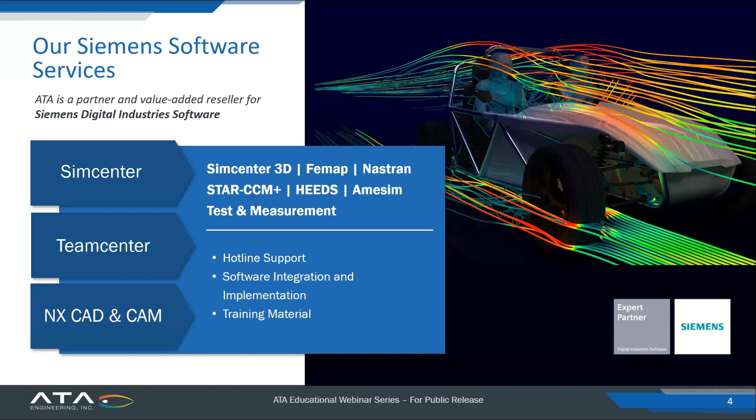I think it'll be interesting to talk about ATA Engineering and Siemens history. It all goes back to a company called SDRC. In the years of 2000, ATA Engineering spun off from SDRC, and we formed our own company called Advanced Test and Analysis Division. At the time, SDRC developed a tool called I-DEAS and later got acquired by Unigraphics and later got integrated into a well-known product called NX, which kind of started out the whole journey of ATA Engineering and Siemens.

Before I go on, I think it's important to thank my colleagues and appreciate their dedication to this project. It's been a project we've worked on to showcase how we can use our tool for this. One good thing about Simcenter 3D is it allows you to leverage your global expertise wherever they are. Because it's CAD-based, you can access the same CAD irrespective of the location you're based in. It can be the same country or a different country, and that's one of the benefits of having a CAD-based system.

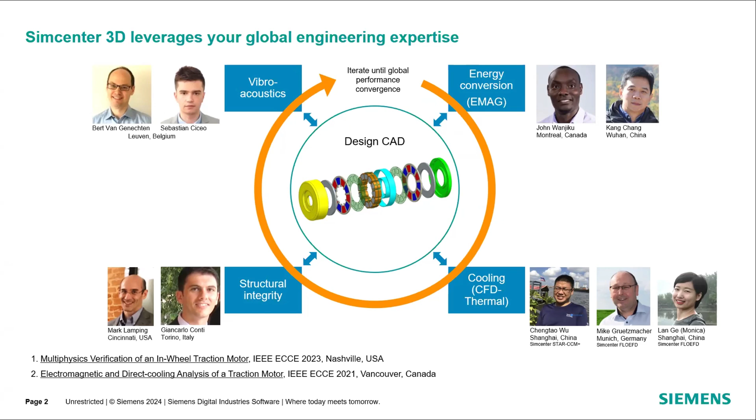We can start off with the trends. I think it's very clear now that we are racing towards EV affordability. All the OEMs, especially in the Western world, are trying to find out how to have a competitive vehicle they can sell to the mass market. Not only that, there's also competition for market share.

We can see that late last September, in China, Volkswagen actually dropped the price for the ID4. It was going from a 26,000 introductory price, now it's about 20,000. If you're in North America, that would be a very good deal if you could access an ID4 at 20,000 US. So that is in China.

Then we know Tesla has been shaving off prices all the way from last October, shaving off 1,000 here, 1,000 there. And this has not yet stopped - they're still doing it even up to today.

Then in February this year, we see BYD actually sent about 3,000 vehicles to Germany. They have gotten into a deal with a ship they call the Explorer, Explorer number 1, which has a capacity for about 7,000 vehicles. So the first shipment was this February, the 27th.

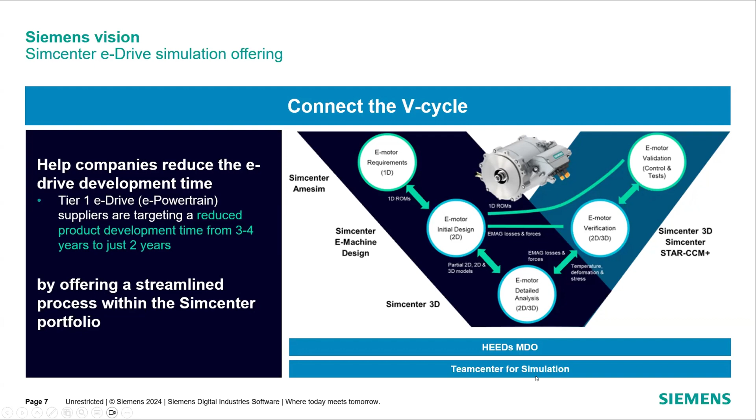This is what Siemens' vision for Simcenter e-drive actually looks like. We are going to concentrate today basically on the detailed analysis in terms of EMAG, and also the verification in terms of the other domains. This V-cycle can be wrapped up with HEEDS for design or managing the process, or you can wrap it up with Teamcenter to be able to track that process.

At the verification stage, what you're trying to do is balance out all this interaction of the multi-attribute performance. We know this is an iterative process. Imagine, and this is something we know is going to happen, we don't know when, but I think it must happen: with this pressure that tier ones are facing, they must be told we need to reduce the cost of the drive by this amount of money.

So the highest priority you'll see is how can I reduce the cost of materials? Can I make a smaller device? Can I swap materials for cheaper ones? Or in terms of magnets, can I actually have a topology that doesn't use magnets completely?

That's a vertical requirement where management says you have to reduce this by a certain factor. Then, if you are the EMAG structure, that's a small portion, but it sets up the rest of the process.

If I switch my machine from one using magnets to one that doesn't, basically an induction machine or a switched reluctance machine, that has other implications in terms of noise and cooling. With an induction machine, I need to cool the rotor. With a switched reluctance machine, I need to deal with vibrations and integrity issues.

So you see this is an iterative process where the decision of one physics might affect the rest. That's why you see the higher level vertical requirement—cost, material, weight reduction—and then the horizontal, how the physics interact with each other.

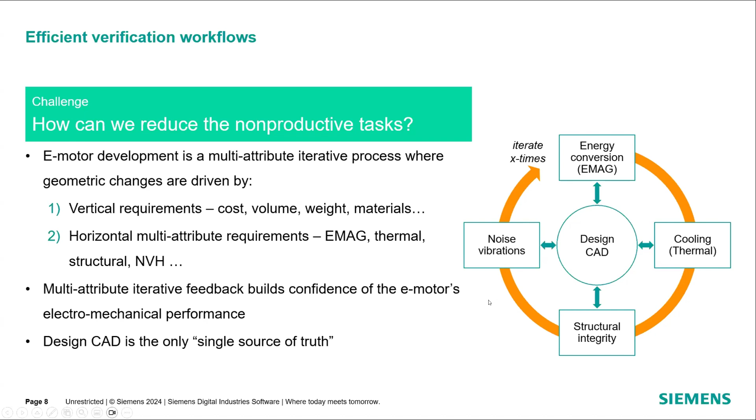You have different mesh models, simulation models, and the only source of truth for all these workflows is the design CAD. The question is, how can we use that design CAD? That's where Simcenter 3D becomes very important.

In a normal conventional single physics workflow, where I as an EMAG person sit on my own streamlined process, or an acoustic person or a thermal person, this is basically what you get—you get the CAD.

The CAD design team comes up with a CAD. I import it, or I talk to them nicely, and they clean it for me. If it's dirty, I have to return it. If it was produced for CAD design, it's not the same as for CAE analysis.

Then I do the pre-post—this is the setup, solve, and do the analysis. That's the normal process.

Now if I adopt Simcenter 3D, which is CAD-based and built on NX, I just consume that CAD as is because it's NX based. Because I'm cleaning it in NX, or Simcenter 3D, keeps the history, it won't forget what I'm doing. The import step is already gone.

Then I do my pre-post, solve, and analysis—I've already gained a step by reducing the import step, because Simcenter 3D allows me to grab what I need for my analysis. For EMAG, I just grab the EMAG bodies.

For CFD, I add my CFD cooling on top of that. If I'm doing acoustics, I add my acoustic pieces, or other things as needed. That's what it allows you to do.

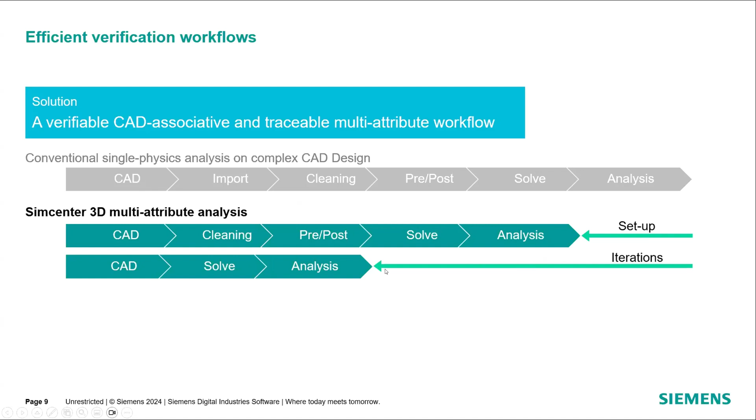Because it's an iterative process, if I change things, I don't have to redo this step, because it remembers what I did—that's why we're saving time. Simcenter really gives you an efficient verification workflow by eliminating some non-productive tasks.

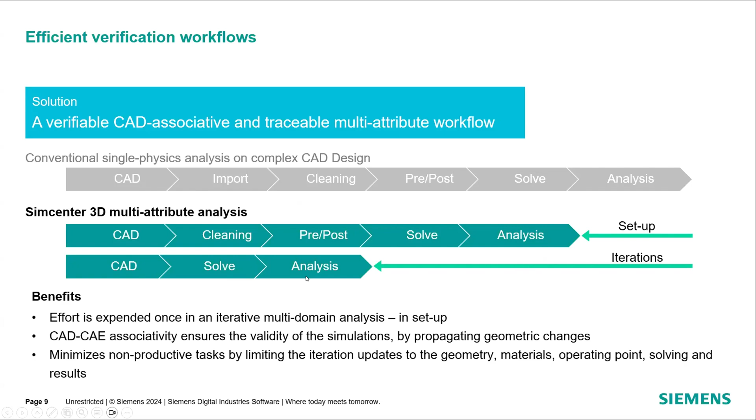The benefit is you only spend the effort once setting up the process. If that process is associative, anything you do on the CAD propagates immediately, rather than spending effort and time recreating the CAD, updating, solving, and doing the analysis. We believe this is what Simcenter 3D adds to the verification process. This is the process we'll use to showcase using an in-wheel motor.

And then we ask ourselves, why an in-wheel motor? So we need to make a case for that.

This is the simplest case you can ever have. If you look at this skateboard, basically an all-wheel drive skateboard, you have the front part of the drive and the back part of the drive. If you propagate them to the wheels, this is what you end up with, and you can see you have more room for cargo and passengers.

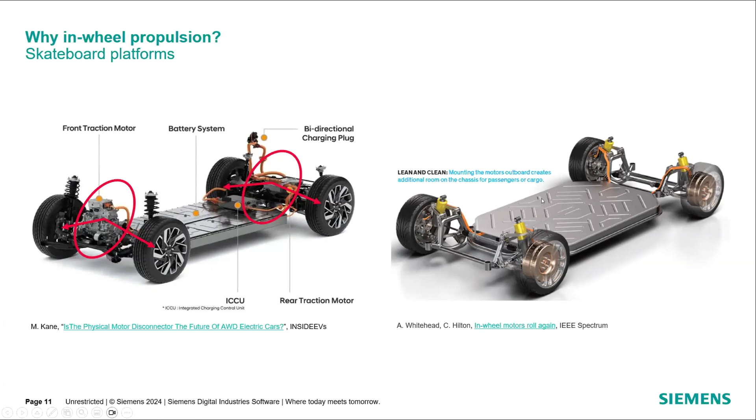The problem with this is you shift all that complexity to the wheel well. So you get more volume, but there's a price to pay, and the price is basically the handling and suspension system because of the unsprung mass.

Protecting these basically from the environment - water, dust, sand, ice. Then complexity, bringing all the power, the coolant, the controls into the wheel, and it's each wheel. And because you're stuck with this small space, that's all where your torque has to come from. There's no other place to produce that torque.

And if it's a two-wheel drive, not even a four-wheel drive, then it's even worse, because the larger the vehicle, the more that wheel at that local level needs to produce that power density. That's the interest for our discussion today.

So then when you get to an in-wheel motor, you have to ask yourself, which type of topology do I choose? We know that outer rotor machines give you more torque than inner rotor machines.

And it can be radial flux or axial flux. At a simple level, you can look at it and say, for this topology, I have one flux producing region, I only have one air gap - we call that an air gap. The gray is the rotor, and the orange is the stator.

We say an outer rotor gives you more torque than an inner rotor, because of the radius - torque is force times distance. So the farther you are away from the center, the higher the torque. That's why you go for an outer rotor machine.

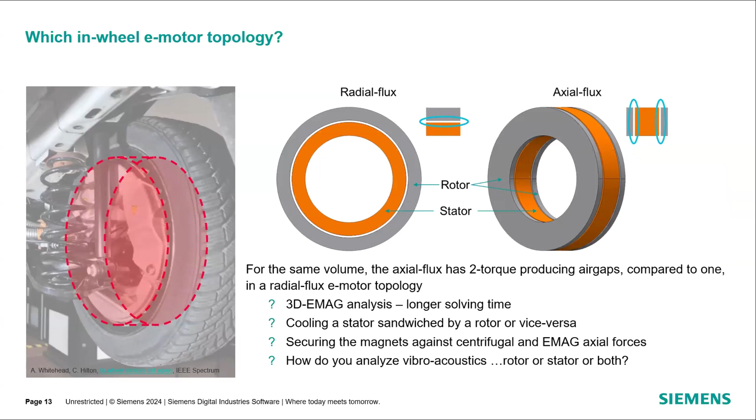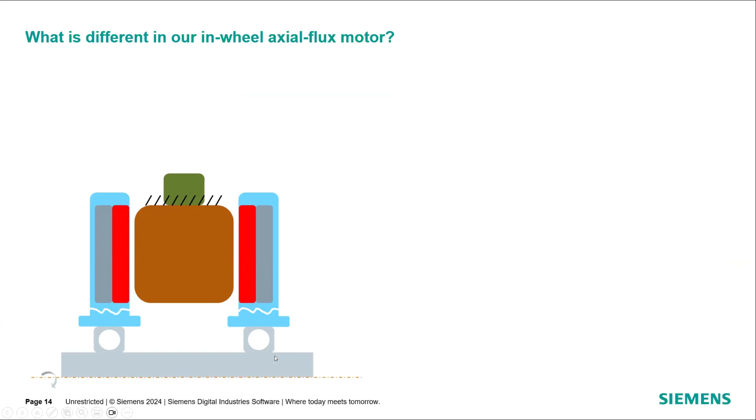So the goal is to maximize the power density, because now you have this extra delta that you can use, since this fixed volume is fixed and you can't do away with it.

It's the wheel well, you can't go higher than that. So, but you can actually play around with these. It's extremely efficient electromagnetically because I'm gaining a delta in terms of diameter, getting higher power density. But structurally, how do I suspend this overhang?

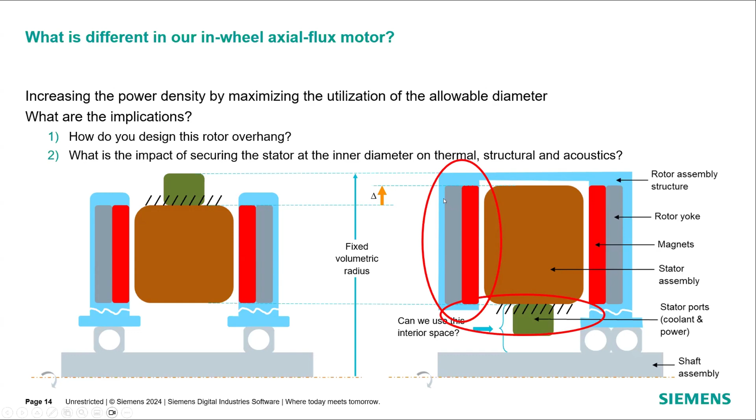And what's the implication of me holding the stator from the inner radius in terms of thermal? Because I'm using a smaller surface area, a smaller diameter, to extract the heat, and I'm using it to hold it structurally. So what's the implication for that in terms of structure or acoustics? And what's the implication of structure in terms of this overhang? So those are the things that are going to come into play.

So we didn't have to look far for a motor, a candidate design. We reverse engineered this motor, and that's the reference. The most important part to look at is the torque.

The torque demand, the rating was about 350 Newton meters at 375 amps. Then the continuous torque about 150 at 120. But the most interesting part is the current density - it's 14 amps per millimeter squared.

If you read down there, the rule of thumb is: below 5 amps, use natural cooling. Between 5 and 10, fan cooled. Above 10 amps, you're doing liquid cooling.

So that's how you either, when you shrink a machine - remember, you have to deliver the same mechanical, electromechanical performance whether you are shrinking or expanding. So the smaller you make the device, the higher the current density is going to go.

In terms of materials, we are using UH because it has very high temperature tolerance. You have to make those decisions as you go. There's no cost implications here - we do not consider the cost.

We assume SMC materials for the rotor core, stator core, the coils, Kapton for the insulation, and aluminum because it's lighter - the kind used for aluminum rims. This can be an affordable material for the outer part of the cylinder for the stator, because it's less subjected to the flux, since the flux is going to be axial, and we use it also for holding together the rotor assembly.

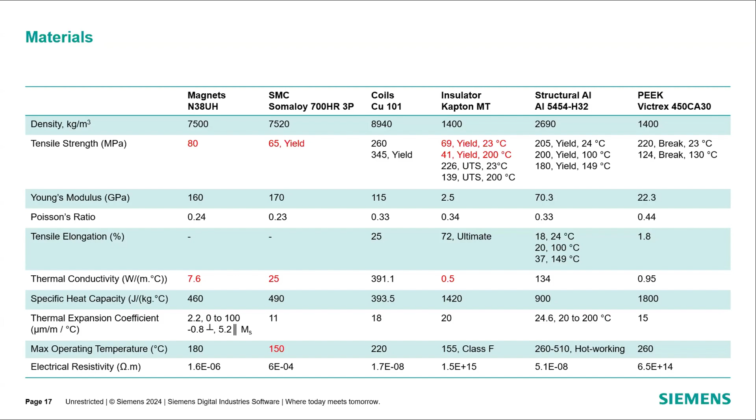Then we dive into the electromagnetic KPIs. What you like to do, the normal process, is you just do the motor characterization. The first thing you do if it's a PM machine like this one is extract the static torque curve, and then what you call the maximum torque per ampere - how much torque can I get for a unit of ampere?

And then you also have to do it under the DC bus limit. That's just electromagnetic efficiency - we're not looking at thermal yet. We're just looking at, if this is the structure I have, how much torque can this structure give me? Because at the end of the day, that's what you're looking for.

Then, because of thermal issues, you have to get as accurate as possible the electromagnetic power losses. And you also have to look at detailed analysis - how does this thing perform under different demagnetization conditions? For us, in this case, we are looking at the extreme demagnetization condition and then under fault analysis.

So we start off with the static torque curve. What we usually do is consider the motor as having two fields, the stator field and the rotor field. We align the stator field in one of the axes of the phases, let's assume phase A, in an ABC three-phase system. We fix the rotor with phase A, then rotate the rotor field, which is the magnetic field in the rotor, and see how they align to get the maximum torque. We do this for a different set of currents.

To translate this back to what we are targeting, 150 Newton meters to 120 and 350, I transformed it, because usually you inject a DC current, back to RMS. Here there's no rotation, it's static, that's why I call it a static torque curve. The structure is very good, this is very ideal, and this is what you actually use for controls.

But because you're going to use direct cooling, we need to introduce some gaps between the coils for the cooling channels - we'll explain direct cooling later. We remove some material from the SMC, and that's the impact you see. Basically reducing material affects the torque capability. But in terms of torque, if we can cool this thing, we can actually go very high in torque capability, so that's the good thing. If you can get rid of heat in a machine, you can go as high as this curve shows before it starts flattening.

From this curve, you usually get the torque speed curve, but because it's a 3D machine, I cannot show all these operating points. So what I did is select a point under the DC bus limit, because the DC bus can only give me this much. Under that, I get the maximum speed where I can achieve the peak torque, and below that, if you look at this triangle, you can get this peak torque.

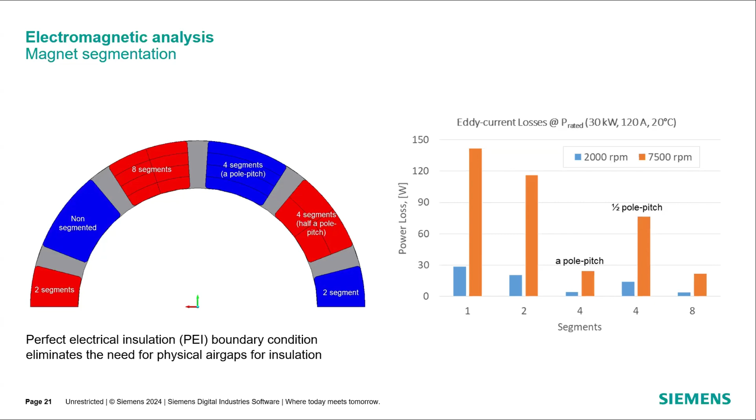So that is trying to reduce the cost of one, assembling magnets, bringing them together, and also basically suppressing your eddy current losses. Then one of the things that you have to do is actually demagnetization analysis.

So there are different ways you can look at it. There is rated, you can do overload conditions when you overload your machine, or you can initiate a fault. And then what you usually do is you set it at 2 temperatures in your solver. So in this case, we considered ideally 20 degrees and 120 degrees.

So the way you usually do it is you have a no load cycle, so this is phase A, one, you do no load, so the machine is not loaded. And then the second cycle, you load it with an overload. In this case, we are using a demagnetizing field, and then you unload the machine. So you have 3 cycles, and then you unload the machine, and then you compare the back EMFs before and after going through the fault.

So in this case, the fault that we have initiated is when I say I have my magnetic field and I have my stator field. If I make my stator field oppose my magnetic field, that's what you say IS is equal to minus ID. ID is responsible for the flux that opposes the magnet or the magnetic flux from the stator. You can use this ID to do that. That's what the controller does in the inverter. And IQ is the torque producing component. So you can split it into a phase of ID and IQ. So basically here I'm making all the flux, all the field from the stator oppose all the field from the rotor. And this is what you see between 10 and 23 milliseconds.

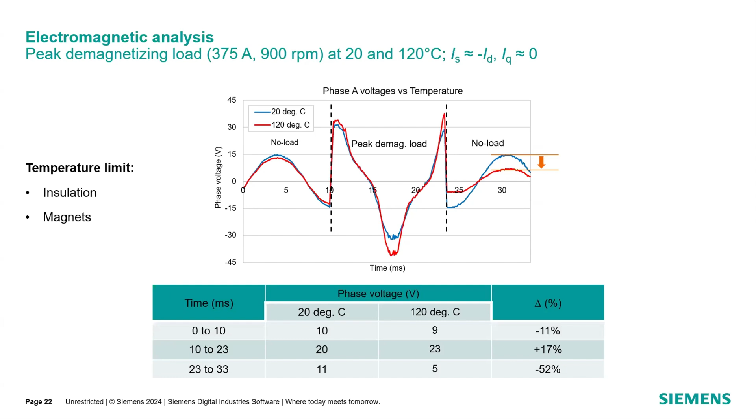So you can look at it and say, if I go through demagnetization and I want to produce a certain torque, I actually need more voltage to do that. And that means because my DC, my battery is limited, I cannot deliver that. So basically that's what that positive over there means.

As I said before, for losses, you really need to account for them to make them as accurate as possible. And then, same case, we are going to save time as much as possible because it's a 3D machine, so it's a divide and conquer mechanism. We use the same PEI, perfect electric insulation. We basically make these links, or they look like conductors. We make them the same, we separate them, but then we add the perfect electric insulation so they don't conduct with respect to each other.

The reason rectangular windings are very good is because of very high slot fill factor, the amount of copper in the slot, and also they distribute the heat evenly. So that's the one good thing about rectangular versus random winding. But they also have a huge problem: they are subject to very high AC losses. And then the other problem is it's very hard to wind them. If you turn these windings, make them thin, and then lap them on top of each other, it's very difficult to reproduce that kind of winding.

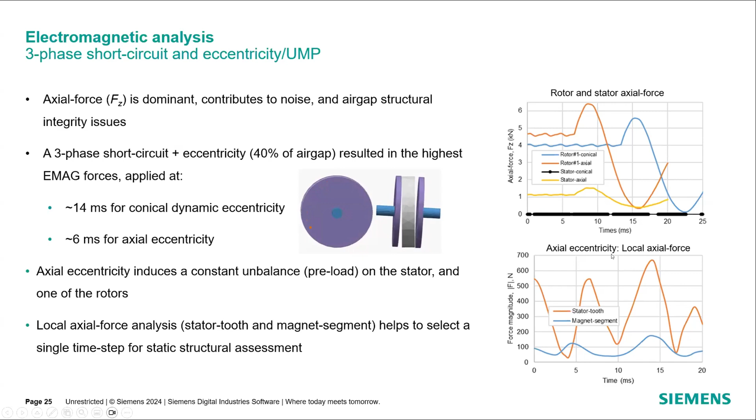You're able to identify and say, instead of doing analysis at the initial location, you'd do it elsewhere. So if you're doing a static analysis to check the yielding, that's basically what we did—checking at the local level, because that's where the yielding happens, not globally. You need to identify which part has the maximum force in terms of loading.

In terms of electromagnetics, basically characterizing the operating envelope, looking at the magnetization, you can look at the fault and the highest operating temperature. It also gives you a feel for insufficient electromagnet cooling, because you need to know which temperatures the magnetization can tolerate. Then for CFD thermal, you need to get your losses correctly.

We saw that you can actually choose two operating points. For structural analysis, you need to find the point with the worst case forces being produced. And at the rotor level, the goal is to avoid using transient analysis for structural analysis and instead use static—identifying the point where you have the highest forces.

After that, we navigate to CFD thermal, which was also interesting. The greater goal is: can you maintain operation at rated conditions, accelerating torque, and cruising speeds? The interesting part with CFD thermal is you have to maintain the driving behavior and feel, irrespective of how the driver drives, where they drive, the drive cycle, or where they live—the ambient temperature. Whether you're in the Arabian desert or living in Alaska, you still need to drive your vehicle. As an engineer, the only things you control are the cooling structure, the type of coolant, the flow rate, and the cooling circuit.

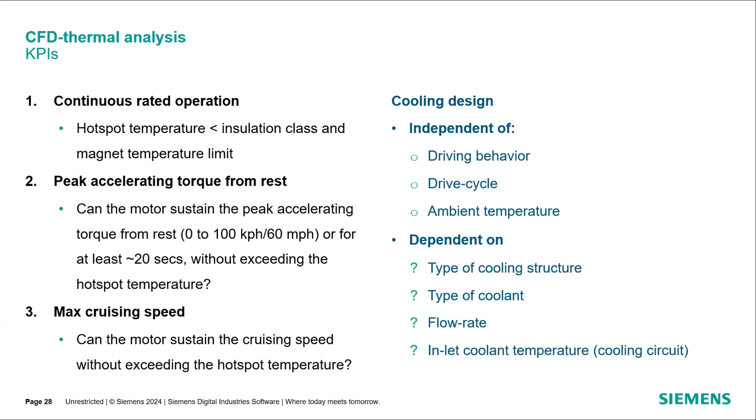It has to regulate the inlet coolant temperature, because after going through this cycle, you can tell how much it can tolerate. So we use the FreedomCAR guidelines to guide us on how to set up the solver. Then the analysis is basically choosing the cooling channels—which kind of channels, especially for the stator, do we select. We use the rated current at 2000.

As we identified two operating points—the cooling performance at peak current, and then the rotor cooling performance at maximum speed—then for the EMAG parameters, to reduce computation effort or the transfer of data between EMAG and CFD, we use volumetric losses per body, and we assume isotropic thermal conductivity.

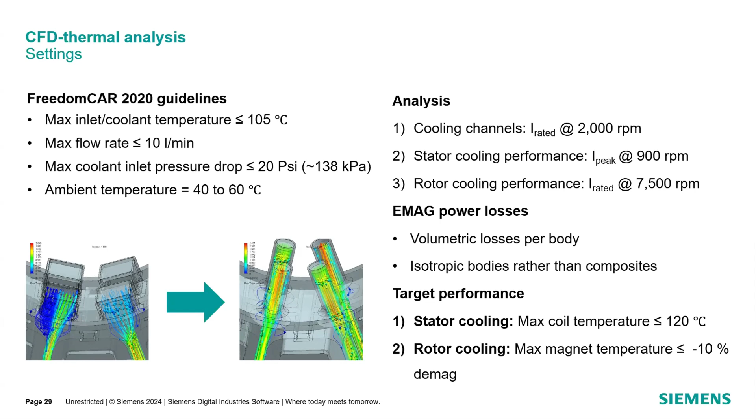The target is: can we go less than 120 degrees? And for the magnets, we need something that cannot demagnetize the magnet by less than 10%. That's on the rotor cooling side.

In CFD, you have two solvers. There's a steady flow solver well suited for the stator, because you have very low fluctuations and it solves faster—even for an axial flux, if you have channels, it can give you results in about an hour, so that's something you can do. Then we have the transient solver, which is a fit for the rotor, because it has to capture the rotor interaction effects between the stator and rotor, the fanning effect—this is computationally expensive.

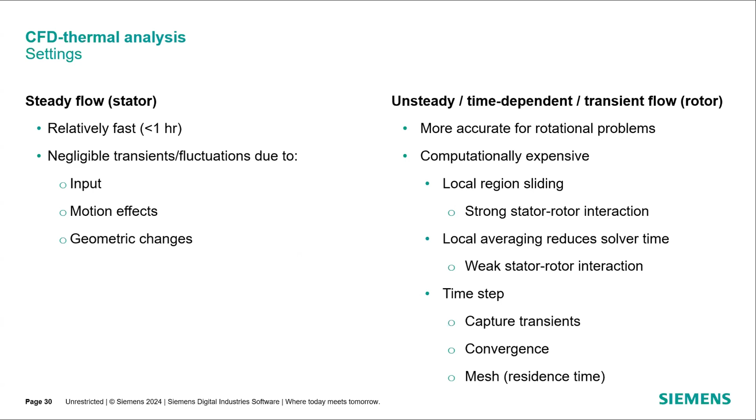So why, how did we come up with the cooling design? Basically because of the size of the machine and the amount of torque it's supposed to produce, especially the peak torque. If you just look at the power density and the current densities alone, it's already pushing toward liquid cooling.

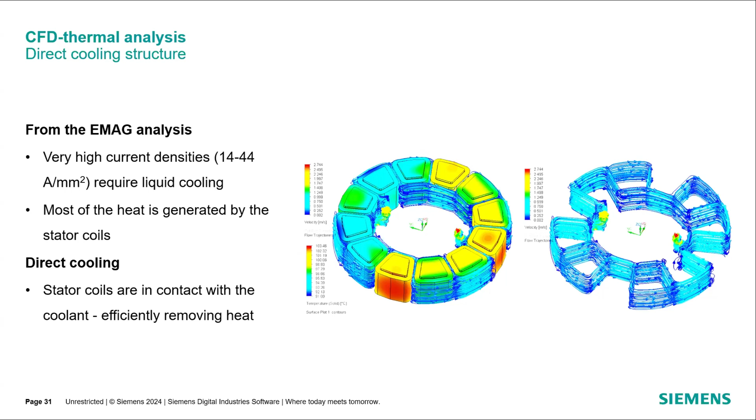Then we thought, what if we trapped the heat, or extracted it at the source? We know the heat is coming from the coil, so if you can get the heat out from the coils, it won't spread to the rest of the machine, and that way we can tolerate very high current loadings. That's what direct cooling tries to do—go at the coil level and extract the heat, similar to how it's done in a transformer, preventing it from spreading to the rest of the motor. The problem is you really have to hold that structure, so the structural analysis of that structure becomes important.

The good thing is an axial flux is amenable to direct cooling, because the teeth are modular, as you can see. You just need to introduce that duct in between, and then see the impact of the duct on the electromagnetic performance. As long as you can hold these coils suspended in a fluid, you can apply direct cooling.

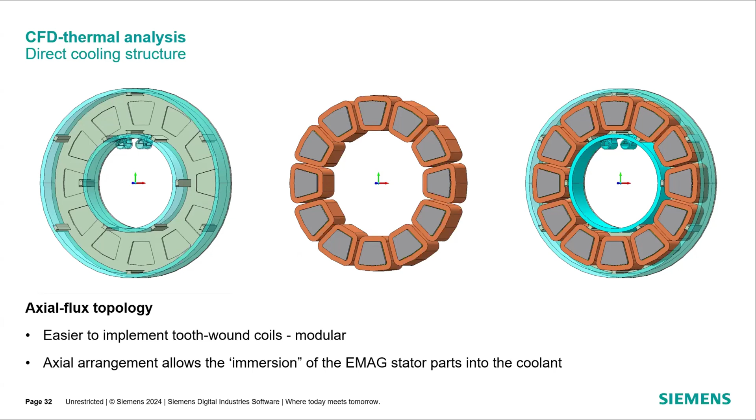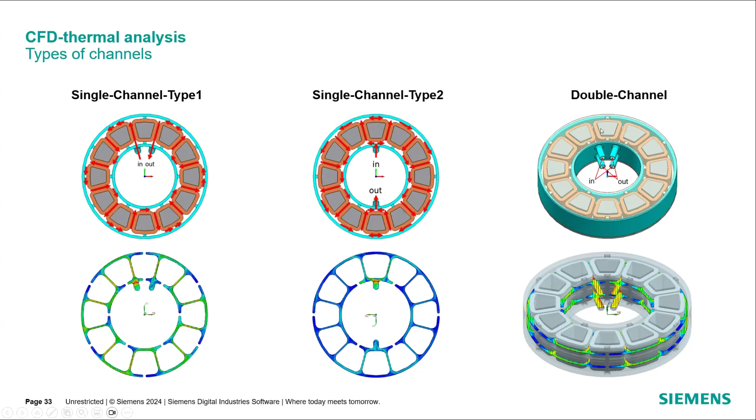Here the fluid is splitting into 2, following the same zigzag pattern, and then assembling at the bottom. A double channel is basically single channel type 1, but with counterflow - one rotating clockwise, and the other rotating counterclockwise.

So this is the performance - it's a comparative analysis, not about the absolute temperature. You can see the fluid going from the top and then being assembled at the bottom. The temperature distribution and the hotspot are higher compared to the single channel type 1 and the double channel.

If you change the scale, you see that because the fluid is basically recirculating like that, the problem you get is non-uniform temperature distribution, and that's what you don't want because of thermal aging. You want to distribute the temperature as much as possible. So those are some of the decisions you can make.

So that's what this double channel does - one circuit goes clockwise, the other counterclockwise. This way you are able to even out the heat distribution.

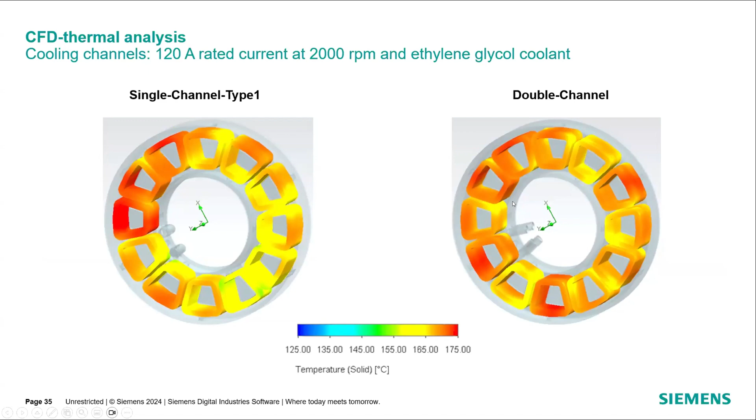For comparative analysis, we use the maximum limit that we had, and we threw in engine oil to see what's the impact. You can see this one gave us the lowest hotspot, followed by that. Engine oil, because its capacity is not as good as glycol, but we just did it to see how it performs with respect to the other.

So from that point, we assume ethylene glycol. Then at peak loading, it was very clear we cannot get this to 120, so we reduced the inlet temperature to 25 degrees and ended up at 125 degrees. So still the 5 degrees basically means your cooling circuit has to push it down. The other implication is you cannot deliver this 375 amps peak current at 900 RPM.

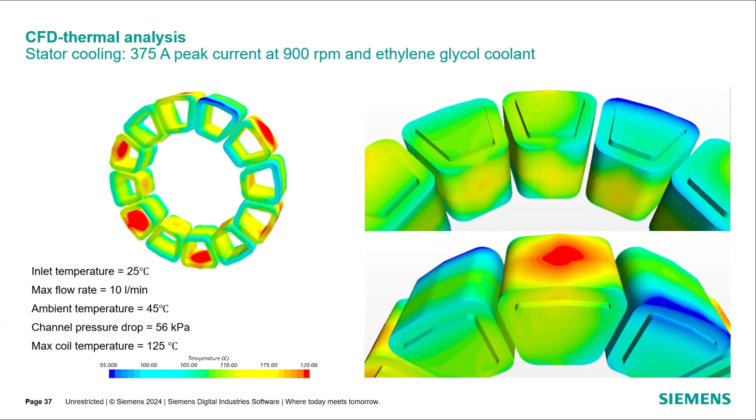You need to reduce it and see how much torque you can produce. So electromagnetically, you can produce very high torques, but thermally, can you sustain those torques? That's basically the question.

For the rotor side, we did the same thing, but now you have unsteady conditions over 3 mechanical revolutions. The interesting part is the stator is very cool at rated current, meaning we can sustain the continuous current demand of 120. But when you look at the rotor side, the rotor core is very cool, and on the magnet side at 120, the magnets are running hot.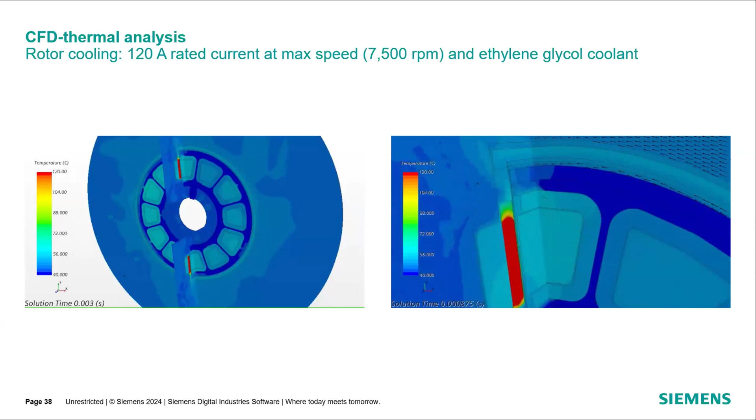So this is when you assume only steady state, with no rotation - you can see on the rotor side it's estimated to be extremely hot. With rotation, because you're taking the fan effects into account, the hot spots show the temperature is a bit lower. And then here you have very huge temperatures.

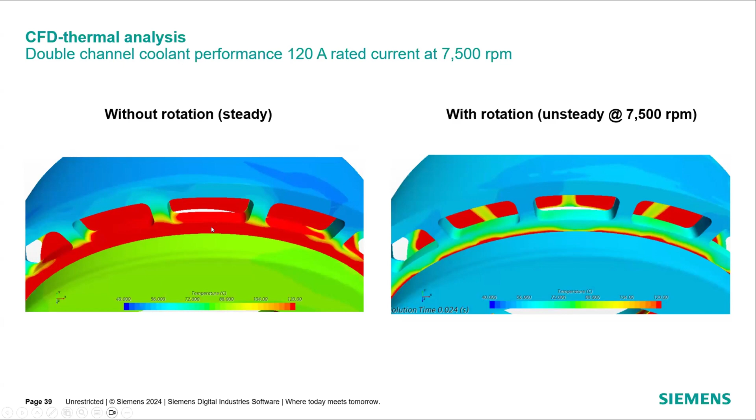So in terms of time, the steady state, as I said before, you can use it - I think even an engineer can train himself to use them. The turnaround time is very good, from 15 minutes to about an hour.

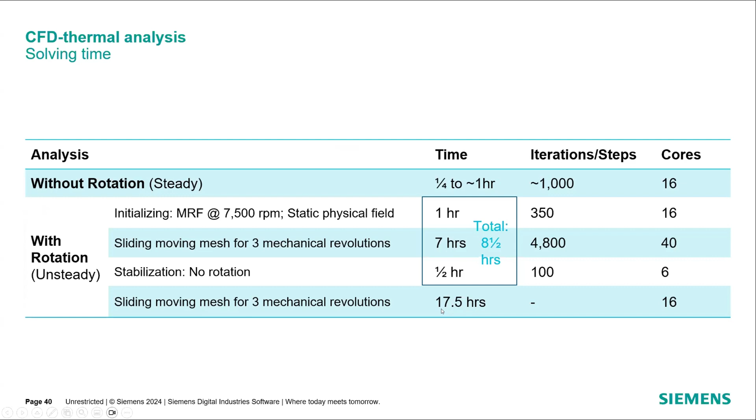With rotation, the best we could get with 40 cores was about 8.5 hours. And for the mechanical revolution approach, 16 cores gave about 17.5 hours, for 3 mechanical revolutions.

So in conclusion, the steady state solver is especially useful for channel design and structure design, and it's very fast. However, it will overestimate your rotor hotspot if you do not consider rotation. For stator cooling performance, you're looking at the insulation class temperature limit based on the materials you're selecting, and how much temperature they can sustain.

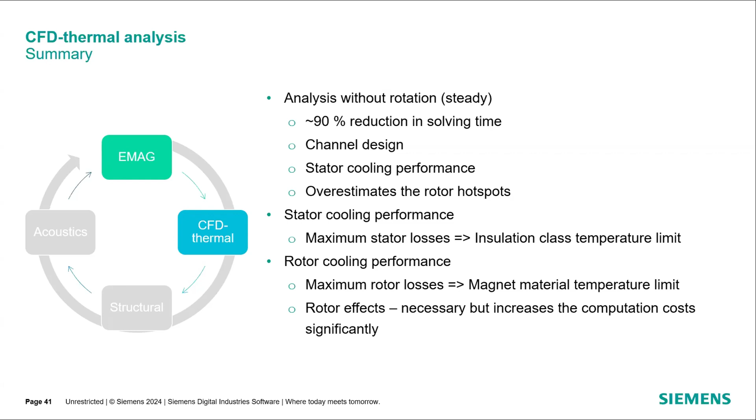On the rotor cooling side, you're looking at the magnet temperature limit, and rotor effects are necessary to consider as well.

Going to the centrifugal structural assessment, as a person I learned a lot. Beyond the normal yielding of materials and displacement, you can learn a lot from these analyses, including avoiding collisions to check whether your rotor is colliding with your stator virtually.

Another interesting aspect is checking, after you load the machine and unload it, whether there is plastic or elastic yielding - essentially checking if there's permanent displacement upon unloading. You can also check different types of assembly.

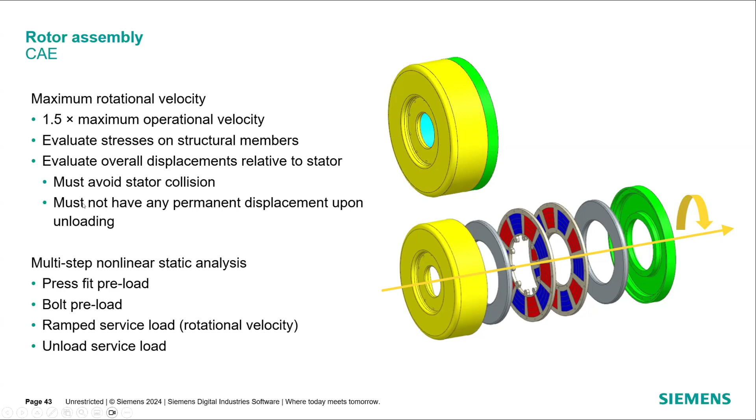So press fitting, bolt preload, establishing contact. And for this point: clamping, rotational, ramped service load, and unloading services.

In structure analysis, you have to basically create the link between the different boundaries for transmission of forces. So housing to housing, for simplicity, we assumed a glue connection.

From the housing to the magnet retainer - this is the piece holding the magnet because of the axial forces - we are holding them mechanically with a bevel. We beveled the magnet, then held them mechanically using contacts and bolts.

Then housing to rotor yoke, magnet to rotor yoke, and magnet to magnet retainer - anything that has contact with the electromagnetic bodies. We had two cases for this.

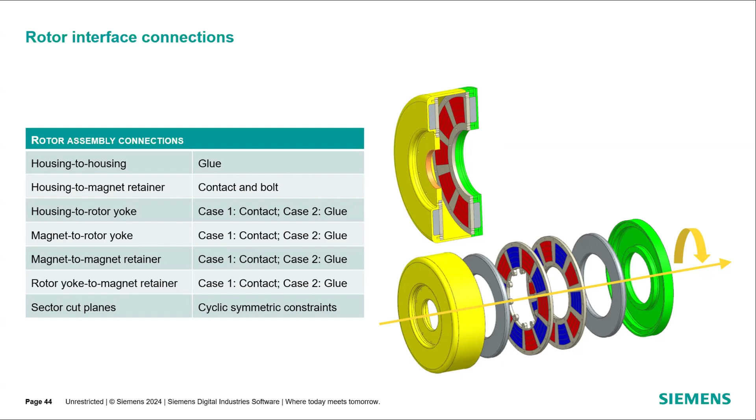The first case was establishing contact using bolts. The second case added glue to that first case of contact, like what you would normally do if assembling it yourself.

The considered design has a press fit, so this piece holding the magnet onto the rotor carrier is basically a press fit. What we had was excessive unseating - at high speed, this thing would basically start to come out.

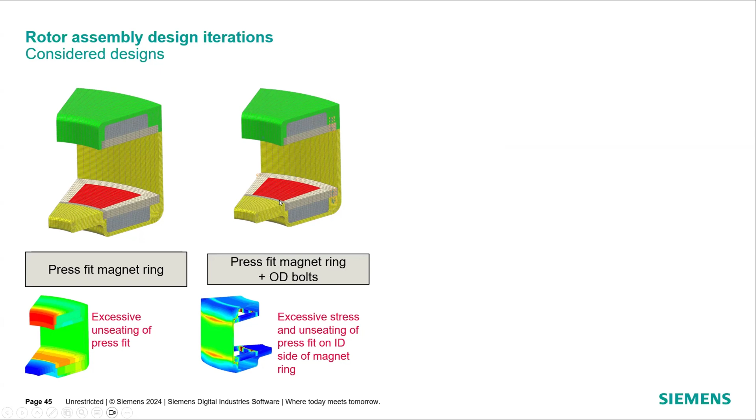So my colleague Mark added a bolt to address this - since it's floating outside, what if you added a bolt there? But then you see on the inner side there was also unseating, so it would still come out, and then you have stresses at those bolt locations.

Then he said, let's bolt it radially on this, to basically anchor and hold it to the contact completely. Then what you have is excessive stress, and the same occurs there - this is the radial case, and then there's the axial case.

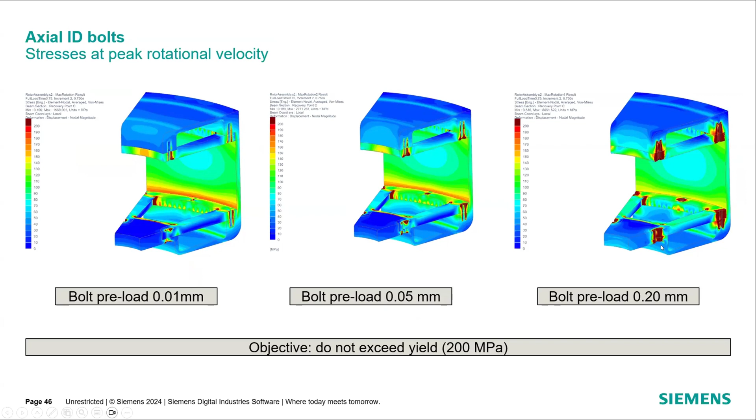So we'll show the results for that. For both preloading cases, as you increase the bolt preload to establish contact, you can see that the stresses also go up. The goal is to stay below that threshold.

Looking at axial displacement - the distance between the rotor and the stator - you want to maintain at least 1 millimeter at peak velocity. That's what Mark was looking at here, for different levels of preload. Between 0.01 to 0.05, there's a very small difference, but as you go higher and tighten more, the axial displacement actually reduces.

The lead one is towards the inner side - this is positive Z and this is negative Z. So they are all going towards the stator basically.

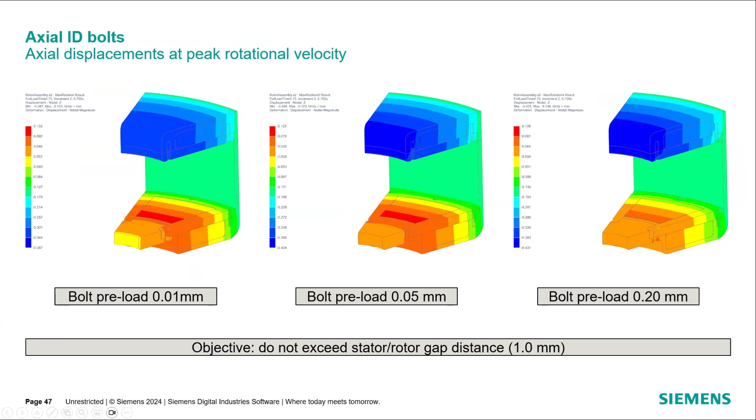So as I said before, we added glue to this case to see what happens with glue added. This is basically the conclusion - the first case being contact established using bolts.

And you can see that this piece, the overhang is going towards the stator on this side, and this is going towards the stator on that side. And the maximum was about -0.4 on this side, which was very high.

Then looking at the stress distribution, there's very little stress actually on the magnets themselves. And when you added glue, it had a huge implication at the end of the day, because it also improved the thermal gaps and the thermal conductivity.

But what glue did in terms of axial displacement, it actually reduced it, because now you can see it's about 0.1 in the distribution.

The other thing it does is, because glue is actually adding stiffness, now they can share the carrying of the mechanical loads. The magnetic materials are now sharing with the rest of the carrier, and that's why you see the stresses increasing in the magnet section.

So we tell people, glue, so continue gluing. It helps in terms of damping some axial displacement, but it's also better for thermal conductivity.

So for me, that was very important because I realized you can actually look at rotor assembly impact on structural performance by simulating beyond the normal yielding and axial displacement that we look for. We can check how our assembly methods influence how our rotor will perform eventually.

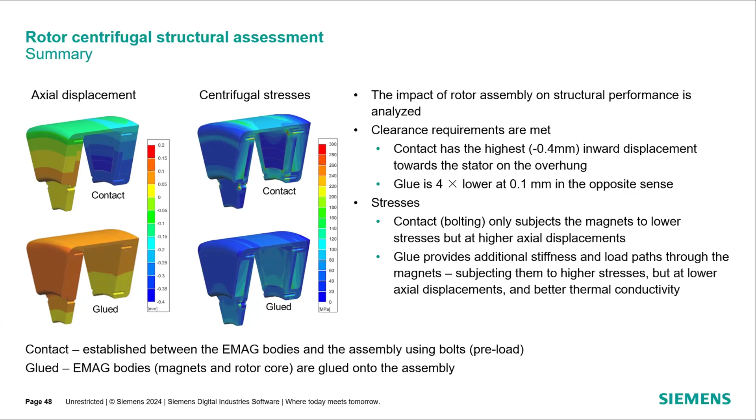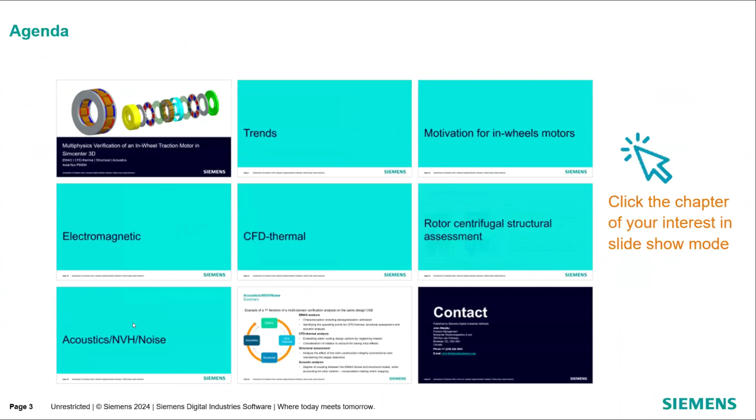So the same can be done on the stator side. Now, because we are short of time, we're going to go to acoustics, and I think that's the dessert of the whole thing. I think you'll find this interesting.

So in acoustics, we know the reason why it's very difficult to do axial flux, or transverse flux, or outer rotor, or inside-out machines, it's also very difficult to do acoustics for them. We know that radial flux inner rotor machine is well studied, there are established methods for that, and we see the difference between the two.

The other part, as we said, axial flux, especially because of the strong axial force, is very prone to manufacturing asymmetries. Usually you choose the highest point where you have the highest electromagnetic force, which occurs at the peak operating point. That's what we chose, before the flux weakening region.

For NVH accuracy, what you really need to do is consider the energy from the different sources and frequencies. You have to maintain them to ensure that when interpreting the results, you are mapping the EMAG forces correctly on the other side, to be able to see how they interact with the structural modes. So that's the analysis.

So the process can be split into two. The first task is trying to find out which kind of harmonics and their shapes are coming from the EMAG side, and this you derive from the air gap flux density. Then on the acoustic side, you take these EMAG forces and map them onto the stator mesh. After that, we're able to do the full NVH FEM model analysis.

With the stator and rotor assemblies, you add the acoustic mesh to be able to do the acoustics analysis, and this way you're able to do that holistic electromagnetic noise analysis.

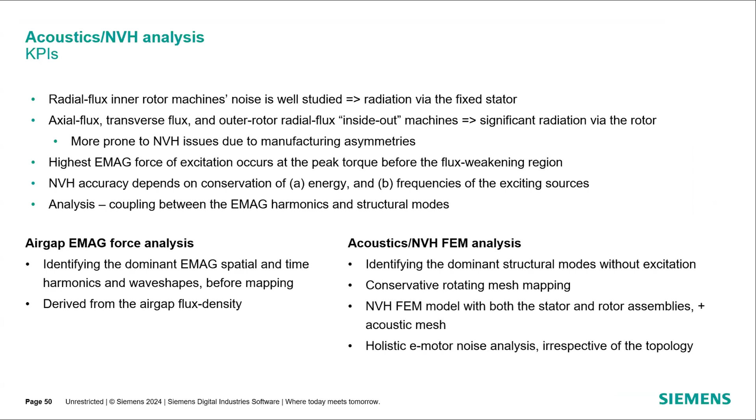So why is it different between EVs and ICE? One, we have the motor orders that are coming from the EMAG forces, which are twice the electrical frequency of the machine. Then you have the structural modes, and the goal is you don't want interaction between the two, or you want to be able to control that interaction.

Then you have these off-zero harmonics, which are basically the inverter harmonics coming because of the switching effect. A normal ICE engine is going to operate in these low order modes, and the low order modes also help mask a lot of noise. Then here you have this high-pitched noise that is characteristic of EV machines.

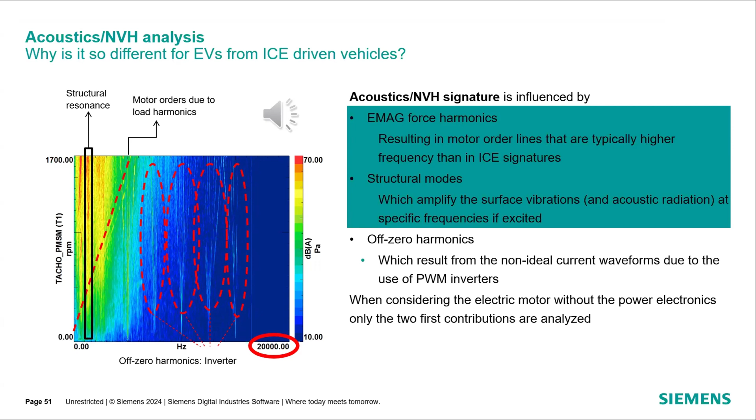So in this case, we are going to consider EMAG forces and structural modes, and because we are using sinusoidal power, sinusoidal currents, we are not using any PWM-driven power electronics. So what you're going to see is forces and structural modes there.

Then you have the EMAG. Usually you extract the forces on the stationary stator, so the stator is not rotating, and then you take those loads, map them, and do a frequency analysis on them, and you're able to extract the orders. Then you try to see if these orders are interacting with the structural modes on the vibroacoustic side, and then you do post-processing and analysis. So that's the biggest difference between an axial and a radial flux.

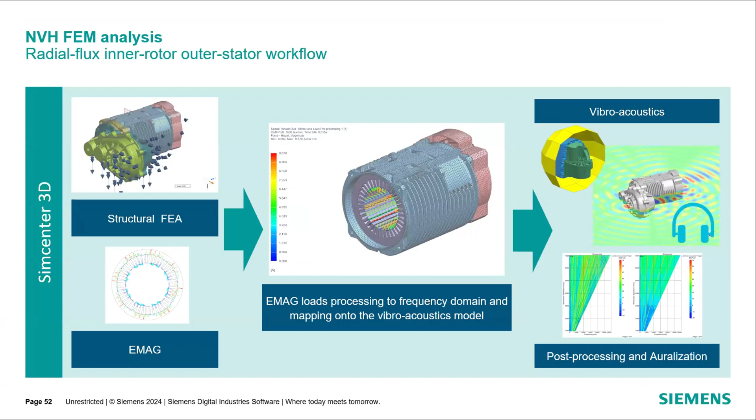Is the stator is stationary, and this is where it makes the process simpler. But in an axial flux or an inside-out machine, it's the rotor that actually radiates the highest amount of energy. But the rotor is also rotating. So on the air gap force side, we have to know which harmonics and wave shapes are coming from the EMAG side, and this is the process.

So you're going to go to the air gap and sample the flux density. And then using the Maxwell stress tensor, you're going to transform that flux density to the Maxwell stress tensor. That's what you see here - this is the air gap position, and that's basically the rotor position. So for each time step, you rotate and then sample the air gap and transform it to the air gap stress tensor. Then after that, you do a 2D FFT on that, and you're able to extract the spatial orders, mainly contributing to the 10th vibration mechanical order.

Indeed, because it's a 10-12 machine, it's going to be the 10 because you have 10 poles. So this is the 10 vibration mechanical order. We can see here we have the positive wave number over there, that is ovalization, so it interacts with the ovalization mode. This is also because in a 10-12 machine, you can model half of it, so that's why the ovalization mode is coming in.

Then you have the minus, the negative 4 wave number that interacts with the square mode, the 10 wave number that interacts with the 10 mode. But also you can see there's a DC mode over there that is going to interact with the axial breathing. So if you have axial breathing mode, this guy is going to be very important, as you'll see later.

So if we use the normal radial flux mapping technique, the one we have today, this is what is going to give you for mapping. So the stator coil maps, they are okay, you can see they are rotating in the same way. But if you look on the rotor side, they're actually rotating in the opposite sense.

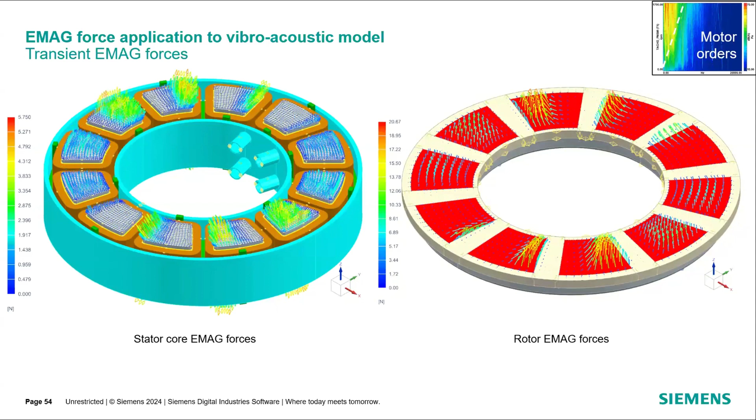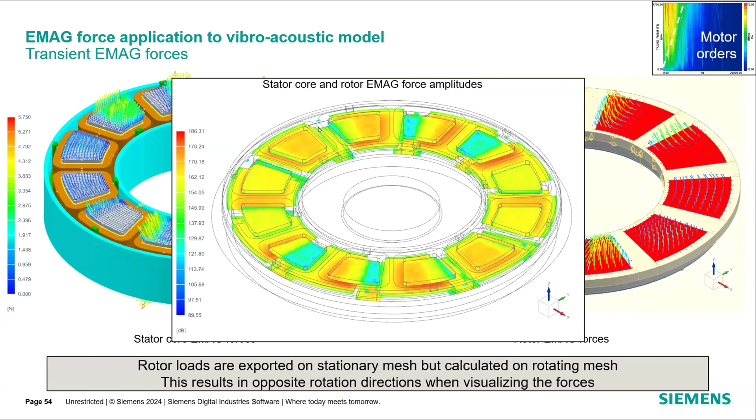If we use it as - because the code, or the normal, if you use the normal radial flux, it does not consider the rotation of the rotor. And you can actually clearly see that. If you look here, the fields are actually rotating in opposite sense, because on the stator side it's doing the right thing since it's not supposed to rotate, but on the rotor side, the rotor is moving. So you have to actually correct for that. So for an inside-out machine, axial flux, transverse radial flux machines, you actually have to take into account the rotation.

And I think we are the only ones who are doing it today. So what we have done in Simcenter 3D, we have a dedicated rotating mesh mapping that rotates the electromagnetic mesh at each time step, and then it does a conservative mapping of the forces. This has been seen to be the best trade-off between mapping, calculation time, and accuracy. Then you also have to ensure that there's a conservation of energy by having that integral sum of forces.

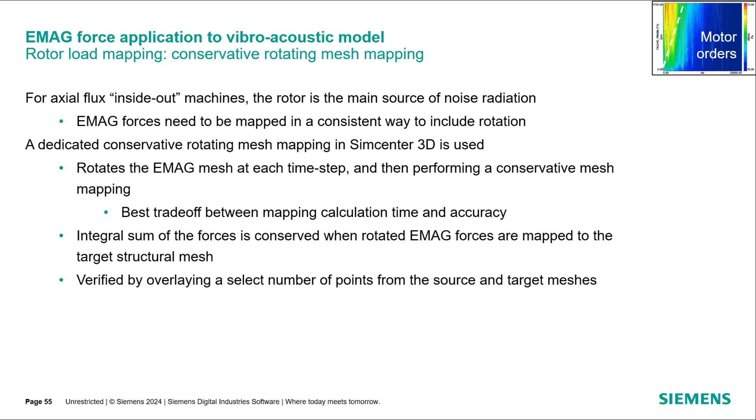And then the other part that you have to do is you have to check a number of points from the source mesh, the target mesh, and see whether you are mapping correctly in terms of energy and in terms of harmonics. So that's what was done now by this conservative rotating mesh mapping.

And then you can see now, not only are they synchronized, so they're all rotating in the clockwise direction, which they're supposed to do, but also the glitch that was there - because we did only 180 degrees electrical - now it looks continuous for a whole mechanical cycle. So that gives you better performance. That's the advantage of this rotating mesh mapping.

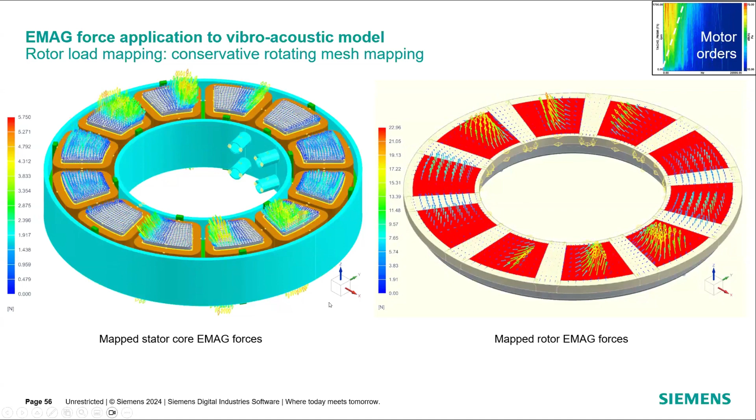So if you look at here now, this is more realistic. The loads are more synchronized. So if you look at the rotor, the shading on the rotor side, the shading on the stator side, there's more synchronization in terms of forces.

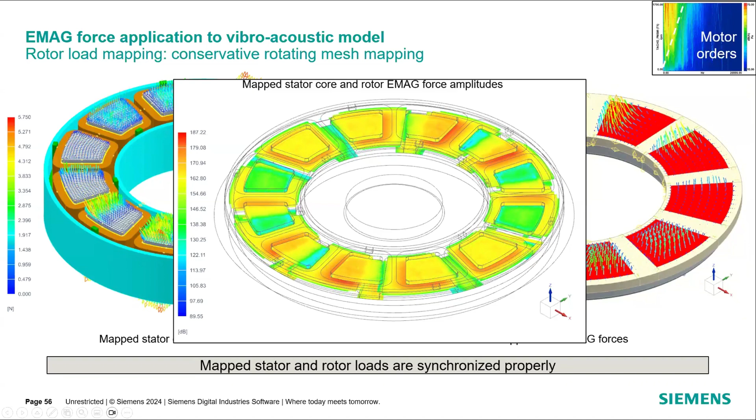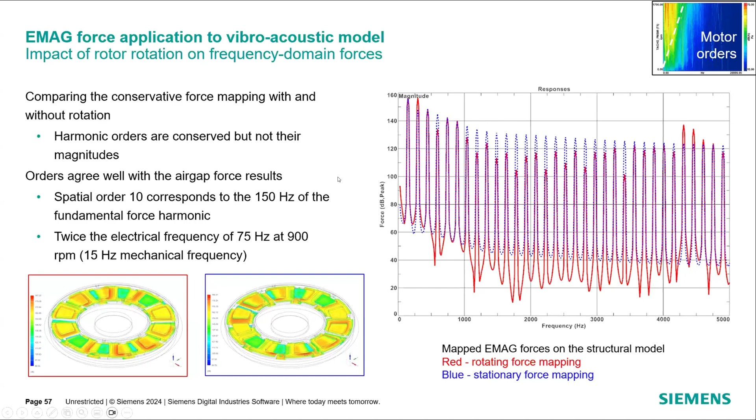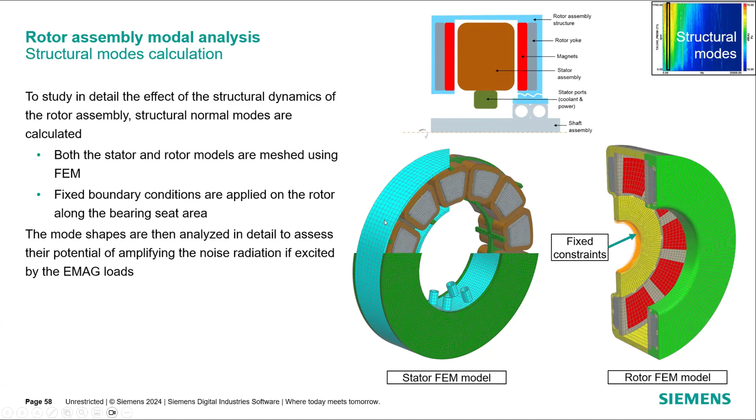So after you finish transferring the data from the EMAG mesh and map it onto the stationary using the right rotating method, you also need to do your structural modal analysis to see which are the most dominant modes from the structure. Based on our structure, as I said, it will have implications because we are holding it, so we assume fixed constraint on the bearing seat. Then we reuse the same rotor and structural modes that we got from the structural analysis, and the most interesting modes we got were these.

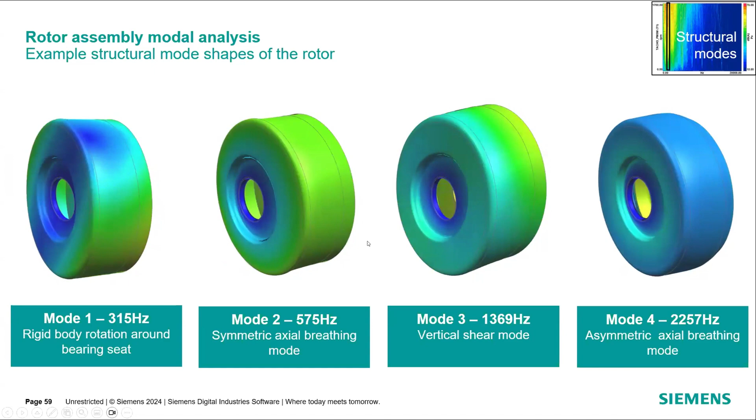So this is the axial flux outer rotor workflow we're talking about. You have the structural, the EMAG, and now we have a rotating conservative force mapping to transform that to frequency domain, enabling more accurate vibroacoustics analysis. In terms of setup, you have to include both stator and rotor effects for the rotating conservative force mapping. Then, using AFM in Simcenter 3D, we can use the structural mesh, and then add the acoustic mesh.

There are two things you can do: you can add microphones to see the directivity of the noise, and also the radiated power, which has to surround the device - you create a contour or surface that integrates all the energy coming from the motor to find that acoustic power. The most interesting one is mic 1, which is in front of the machine side wall, on the side that is not anchored on the fixed side of the machine.

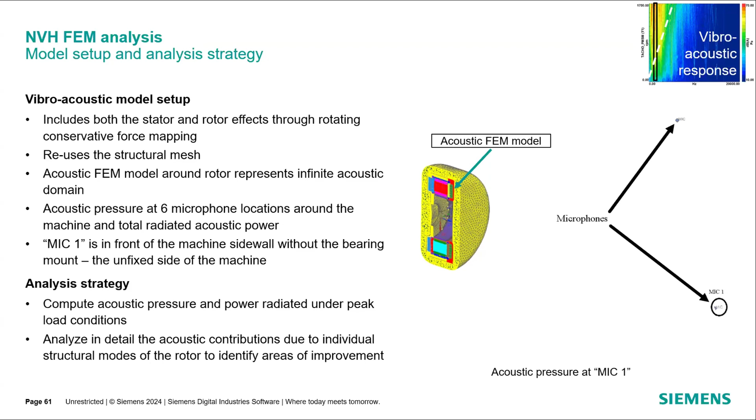In terms of analysis, we look at the acoustic pressure and power radiated at peak load conditions, and then how these modes interact with electromagnetic loads. This is the acoustic pressure at mic 1 on the side that is not fixed on the bearing seat, and this is the acoustic power - basically getting all the pressure and integrating it around the whole device to quantify how much noise is coming from the device.

This is directivity. If a device - let's assume you're told, I just want to know what's the noise I'm hearing, or the noise performance in a particular direction. So these are the modes, and usually if you look, they seem the same, but they're not really the same - and those are the EMAG forces.

If you superimpose the rotor structural modes, you're able to see that the difference is very small in some places, but you have this one that shows up in acoustic power - though if you're measuring from mic one, you would not be able to see it. The other interesting one is where you have very dominant, huge energy, which elsewhere is very little.

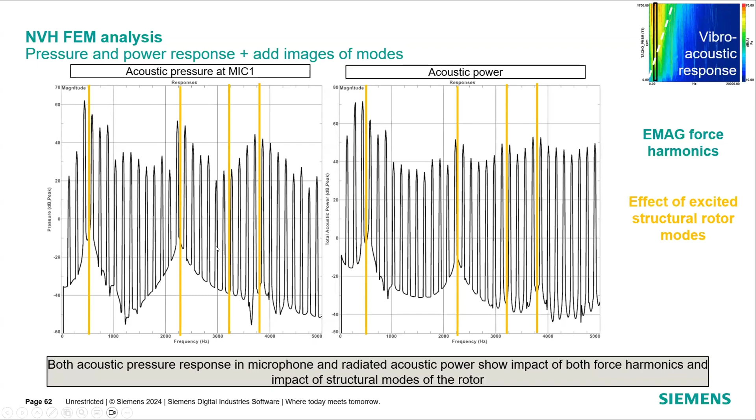Then the next step is basically how can we now analyze this? Let's assume you wanted to know how to analyze these results, and how can I reduce my noise or improve my acoustic performance?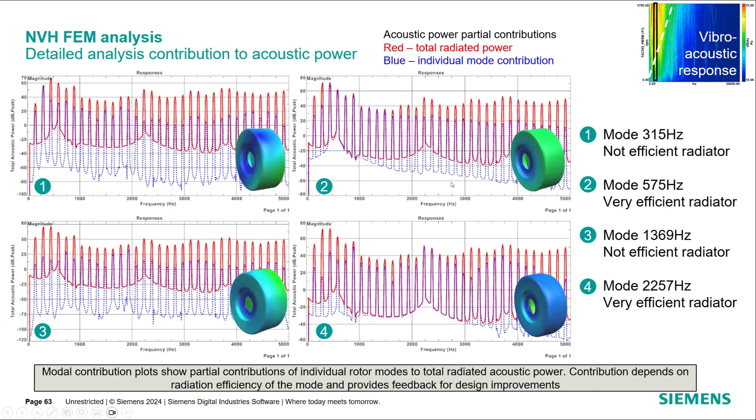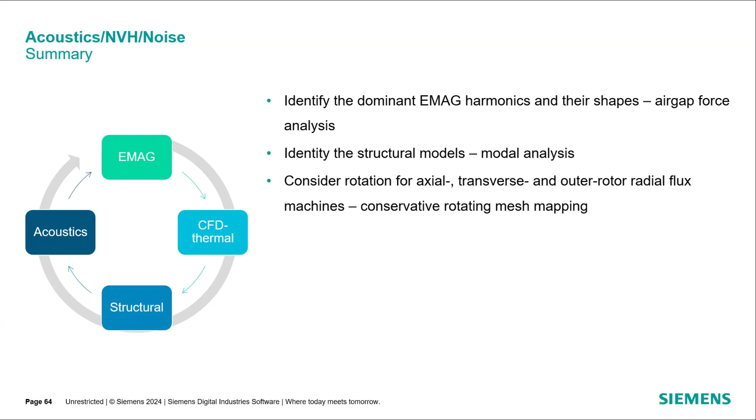So in summary, for acoustics, you need to identify the dominant EMAG harmonics and their shapes — that's why you use the air gap force analysis, because we are just sampling the air gap, not the whole domain, especially for an axial flux, we're just sampling at the average air gap.

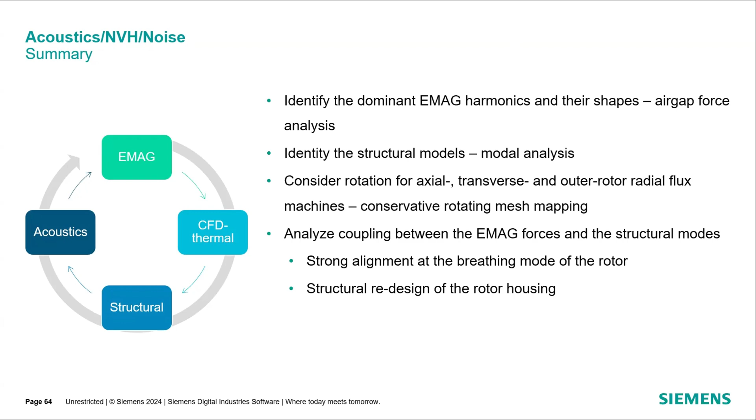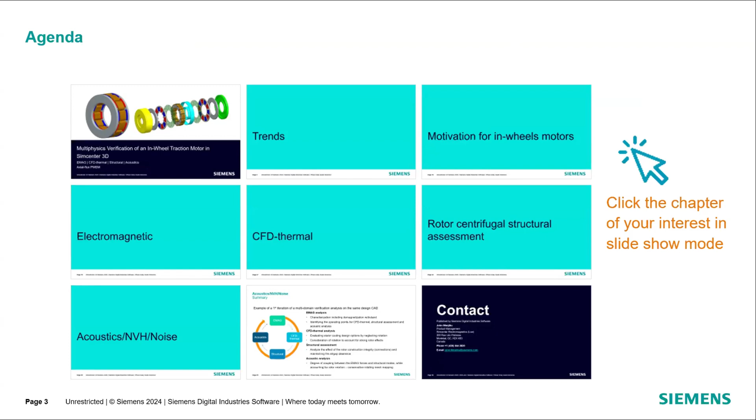Then to identify them, on the structural side you have to identify the modes, then map things the right way. For axial or inside-out motors, you need to use the rotating conservative mesh mapping. From there, you'll be able to analyze the coupling between the EMAG and structural modes and see how they influence your vibroacoustic performance.

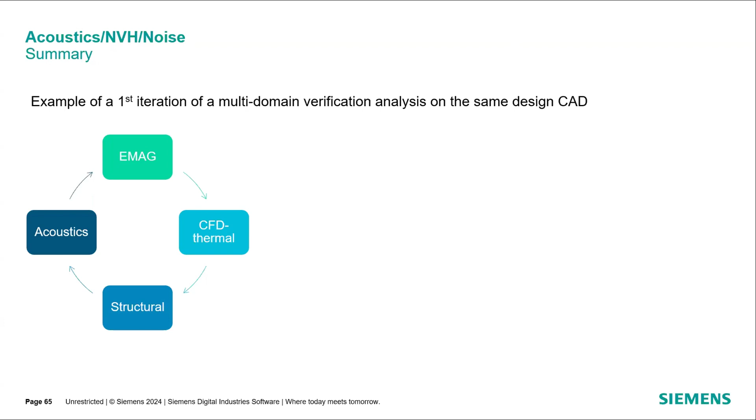So this was an example of the first iteration of a multi-domain verification analysis workflow inside Simcenter 3D. We tackled ways of how you can save time in terms of EMAG, how you can play around with your model to extract key performance characteristics, including demagnetization, loss analysis, and how we can identify points for CFD thermal analysis, structural assessment, and acoustic analysis — that's the peak where you have the highest electromagnetic forces.

Then for CFD thermal analysis, we saw that for stator cooling you can neglect the rotor effect and get away with it. But for rotor cooling, because of the strong fanning effects, you really have to consider the rotating effects.

On the structural side, I was impressed that you can look at the rotor construction, how the rotor is going to be assembled, and the impact it has on rotor integrity — the same can be extended to the stator side. Then on the acoustic side, there's the need for conservative rotating mesh mapping, especially for inside-out motors, to establish the coupling between the EMAG forces and the structural modes.

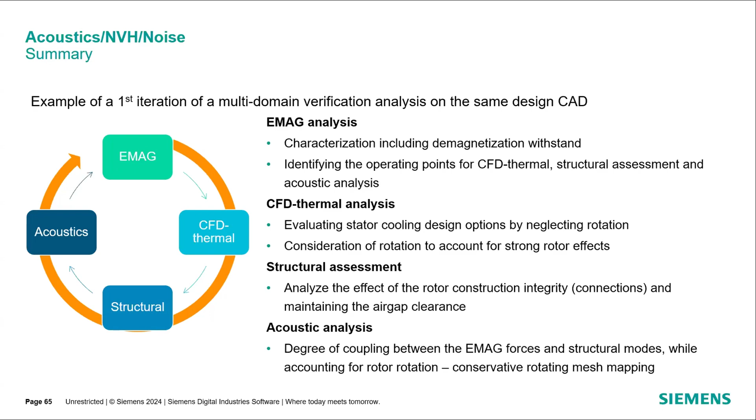And I think that brings us to the end of the presentation. I know I was racing.

Yeah, I think we have some questions. It seems like we have some questions in chat. So the first question is from Arvind.

Are there any templates available for axial flux motor in Simcenter? If yes, are there any options for coreless axial flux motors?

They are not templates, but you can create your own templates — it's parameterized. That's what I've done here: I've created a template that is parameterized. I can change the number of poles, the number of slots. So you can create your own template that you can drive basically, and that maybe is the beauty of Simcenter 3D, because it's CAD-based. If you have a good design team, they can actually create an assembly that you can play around with in terms of parameters — in this case we can change the number of poles, number of slots, inner diameter, outer diameter. So that's something you can do yourself, or it can be done for you in terms of services.

And the next question is from Cynthia: did you happen to study the eddy current loss due to Somaloy 700?

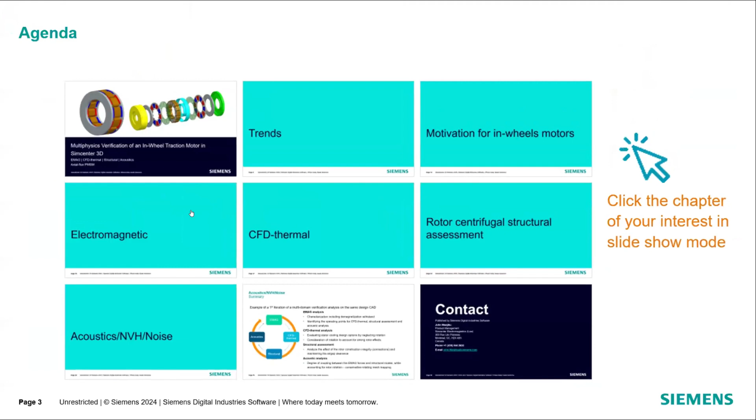Is it the aluminium or what? Sure. Cynthia, if you want to elaborate on that, we can unmute you, and you can ask him directly.

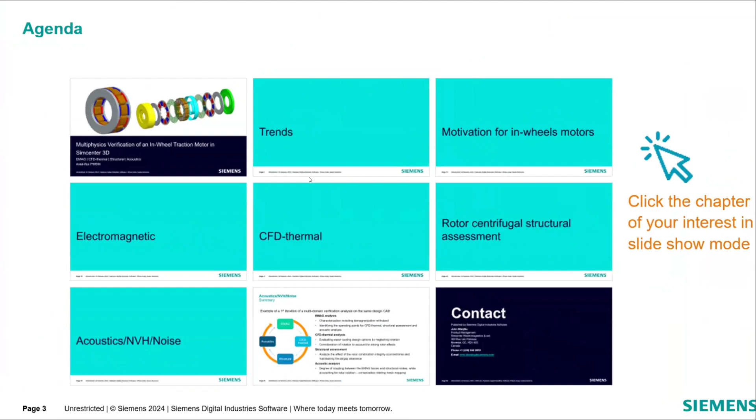700, I didn't understand there. Oh, Somaloy, yeah, Somaloy is SMC 700.

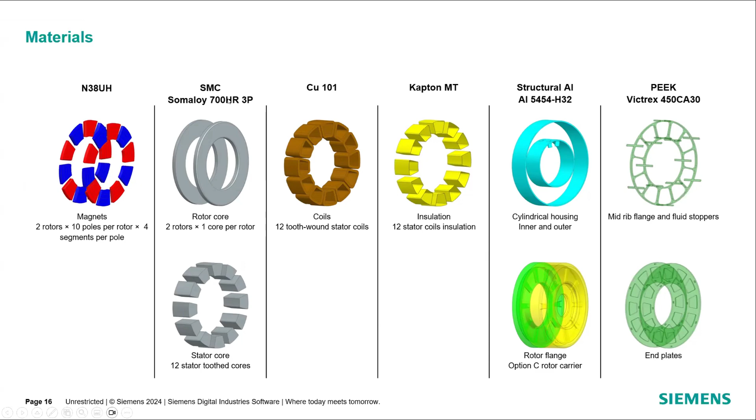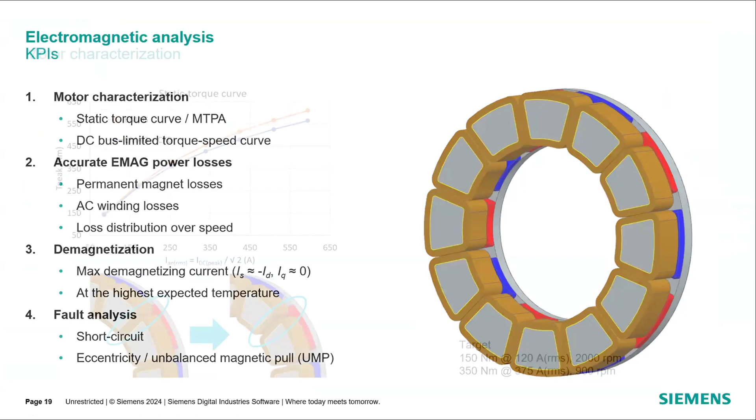So what you have to do is turn it on. Yeah, we have turned it on. That's why if you look at our loss analysis, we have some losses associated with the rotor yoke.

But what you have to do is define the bulk conductivity, because the good thing with SMC is they measure it in bulk, it's not like electric steels. So whatever they give on the data sheet is actually the bulk conductivity for SMC. So you can turn it on, yeah, and that's what we have done over here.

On the rotor yoke side, yeah. On the stator core, the same - you have some value for the stator core as well. Got it, okay. I hope that answered the question.

Next question from Arvin: Is there an option to include eccentricity of rotor during performance study? Is it an option on the solver side, or induced by the user? Basically, what I do is create my own eccentricity on the model.

So when creating the part files, I create an ideal condition, then use a command that I can invoke from the solver. Because I have different solutions, from that solution I can say this is my eccentricity static, this is my eccentricity dynamic, and run this over. But there's no option where it's geometric, just make it eccentric - no, you have to create those conditions on the geometry yourself and set the rotation reference.

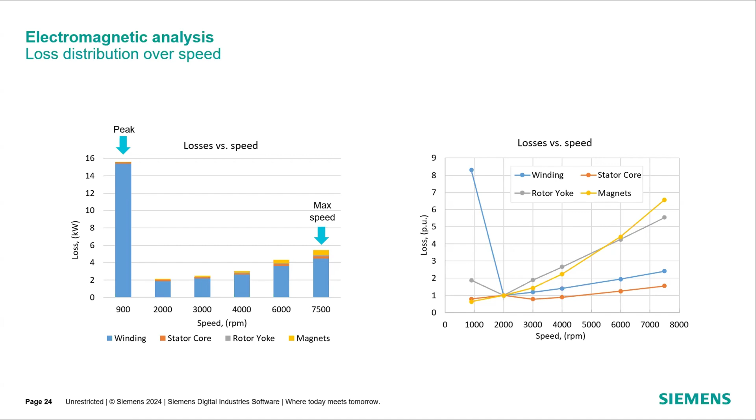So what we discovered is in electrical engineering, for insulation, you either use an air gap - if you have two conductors, you have to separate them with insulation. So they are insulated, keeping the currents between one and the other so they don't touch.

So we realized what you normally do is create a small gap between the two. And in terms of the mesh, you're going to stress the mesh because you have to create these small meshes, and in terms of aspect ratio they are very small. So basically you are stressing the mesh to create that.

So in terms of the magnet solver, we have what we call perfect electrical insulation. Basically you apply the same face, shared by two bodies, but it just restricts the current from flowing from one side to the other. So that way you can use it for laminating effects.

You can use it for what I've done over there, for the AC winding losses - the same thing we use for segmenting magnets, for segmented magnet analysis. And it's the same thing you use for laminating effects if you want to study them.

And that way now you can turn on eddy currents in that piece. Instead for these coils, you have eddy current computation, but this one I'm treating as bulk, so there's no AC losses - it's just this piece that has AC losses. That way I can quicken the solve for AC loss analysis instead of turning it on for the whole model.